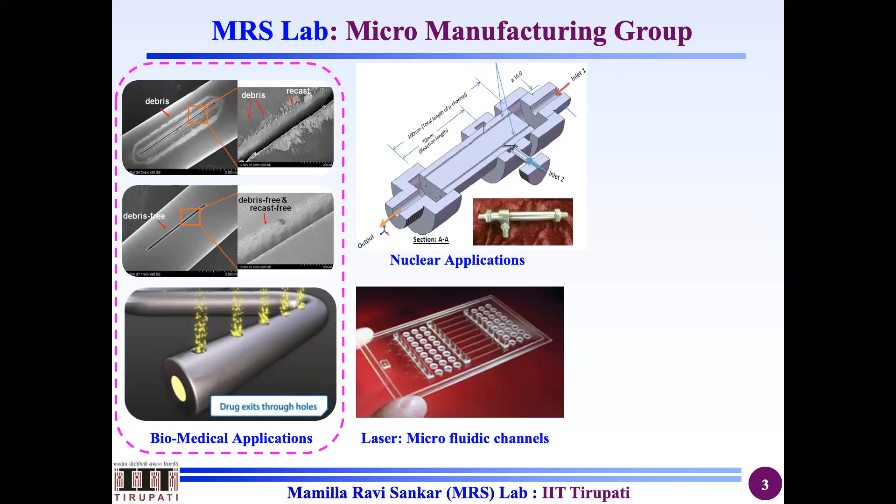The first group is the micro machining and nano finishing group. We work extensively on micro machining of drug eluting stents, and micro machining for a lot of things like nuclear applications, microfluidics, automobile applications, and we also do laser cladding systems. Laser cladding is again one way of additive manufacturing, because you are going to coat some microns of thickness on the surface.

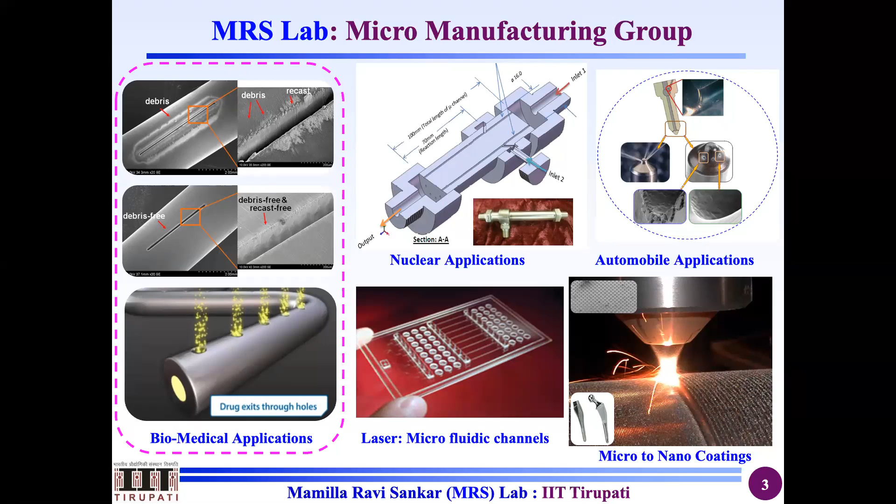Okay, so you can do this coating by multiple means. Being a mechanical engineer, normally we try to do it by lasers. However, there are better processes such as physical vapor deposition, chemical vapor deposition, and HVOF, high velocity oxy-fuel coatings, and many varieties are there.

Another variety of finishing process that we work on is magnetorheological finishing. These types of finishing operations are mostly used for lens polishing applications. For example, I would like to tell you how the lens is going to be polished. Once the fluid is there, it is randomly oriented.

Whenever a magnetic field is applied, for example, if I stop this, the magnetic field will come. You see the red lines, this magnetic field comes. Now, once a magnetic field comes, what is happening? This is the application of magnetic field by virtue of electromagnets. These are called CIP particles, carbonyl iron particles, and these are abrasive particles. So this polishing is called smart polishing.

For example, if you take the grinding process, how do you specify a grinding wheel? Type of abrasives, size of abrasives, grade of the wheel, structure of the wheel, bonding material. These are the 5 varieties. Grade of a wheel means how firmly the abrasive particle is held by the bonding material. So at a particular instant, you can order soft grade, hard grade, or medium grade.

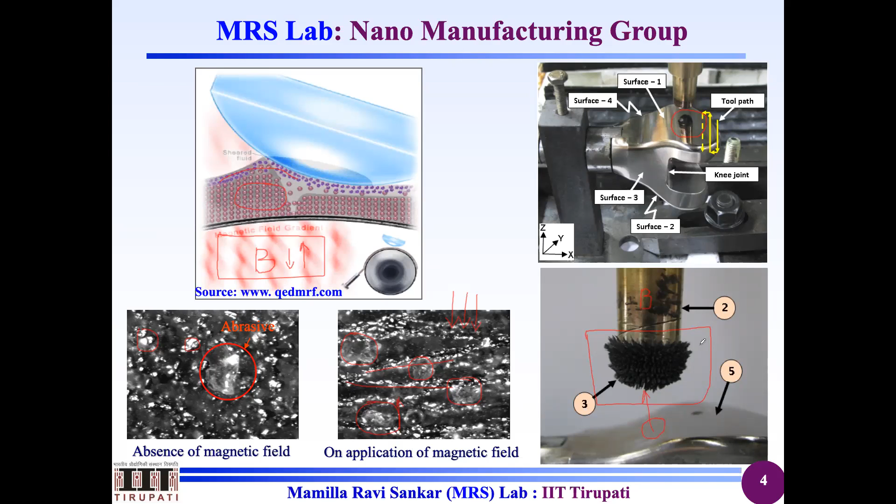Nowadays, soft, super soft, and ultra soft came into picture. So this depends on that. How do you decide? It depends on the force the bristles apply on enamel. That decides whether it is hard or whatever. So nowadays hard and medium are slowly nullifying, and you are getting soft, super soft and ultra soft. Like the Colgate sensitive toothbrush will be ultra soft. So that is one area.

The second area where we extensively work is sustainable manufacturing. Sustainable manufacturing means whenever you do, I don't know whether the video works or not. Yeah, video is not working. So it is saving our time. Okay. So what is sustainable manufacturing? What we talk about is that

whenever there is a machining operation, temperature rises. When the temperature rises, to cool it or to overcome it, you have to take two options. One is going for the hardest tool which can overcome these temperatures. That means either you have to go for a CBN tool or a diamond tool, which is not an economic option as far as developing nations are concerned. The second option is cutting fluids.

Cutting fluids range from 1200 to 1800 or 2000 per 20 liters. Each liter of this cutting fluid can be mixed with 10 liters of water. In that circumstance, it will go to 220 liters. So 220 liters you are getting for an average price of 1500 rupees. That means less than a cutting tool. Okay. That means being a developing nation, we try to go for cutting fluids. When you go for cutting fluids, what will happen?

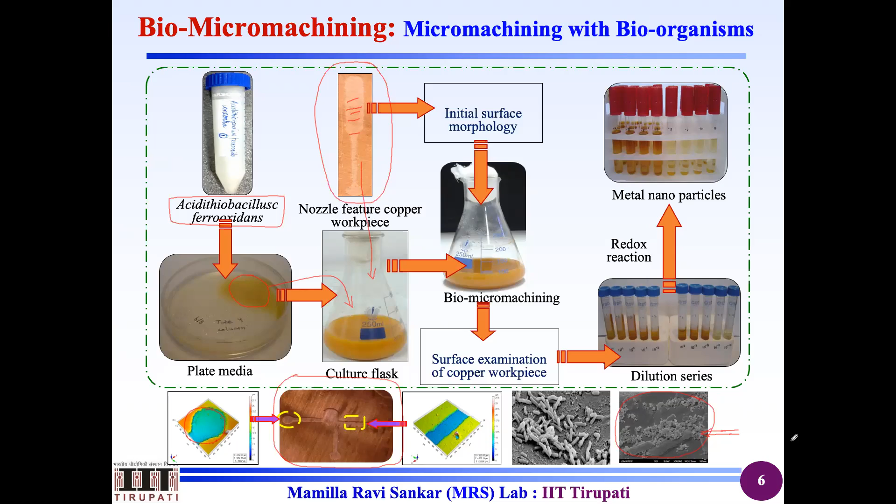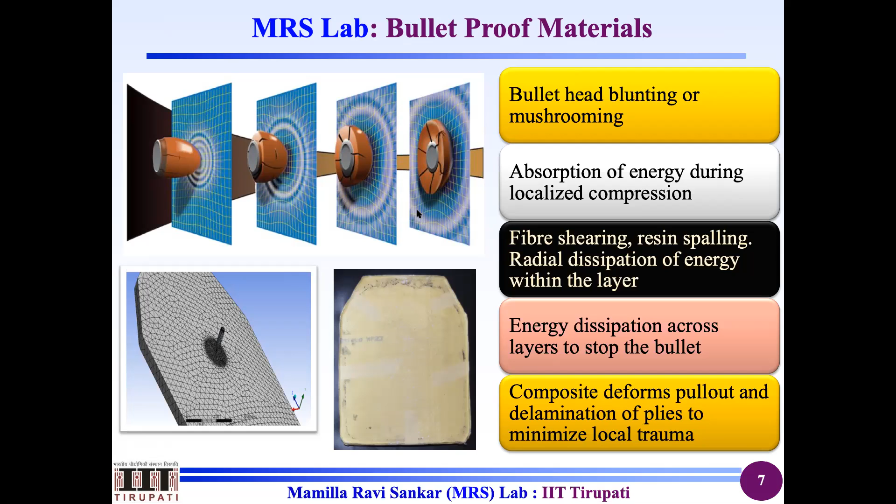So second area, the same guy is continuing his PhD. He is Lieutenant Colonel Sanjeev Kumar Sahu, currently working at Jammu Kashmir. So they have their own facilities, and we only support partially. So our role will be very minimal here. However, since our inputs are always well taken, this is a project that we are doing with IIT Guwahati, because he is my old student.

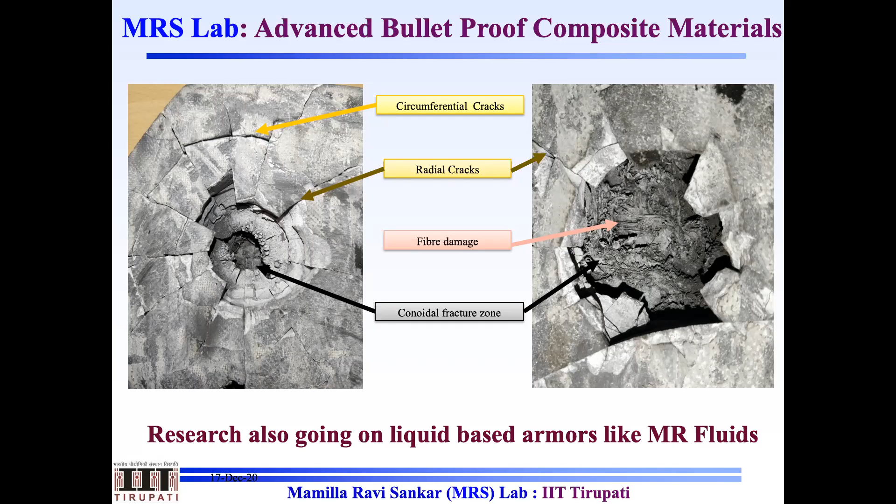So what we do is, this is for ballistic impact test for vehicles, because people are transported from one place to another place. So there will be firing from the opposition and other things. So for this purpose, we are developing ceramic composites. As you said, we also work on additive manufacturing processes. But the most important thing is that one has to wisely think, as per today's concern, where to use, where strategically one has to use.

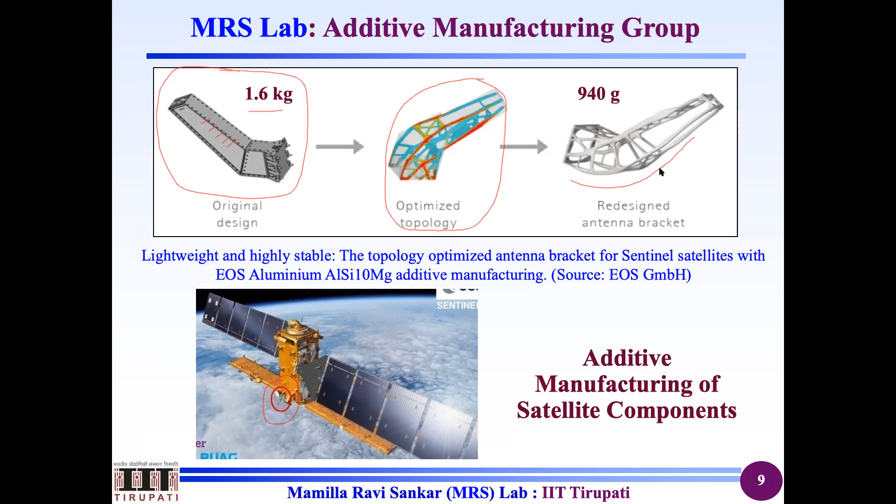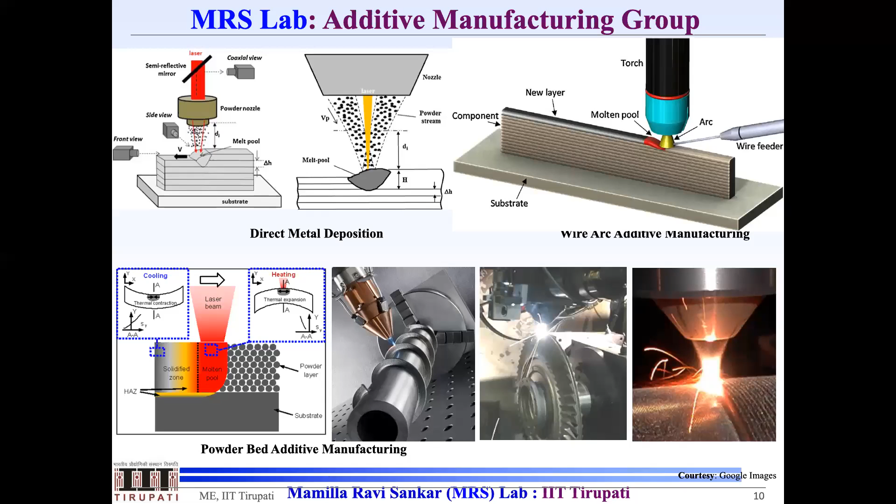At IIT Tirupati, along with our collaborators, we work in many areas of additive manufacturing, ranging from direct metal deposition or direct energy deposition, wire arc additive manufacturing, or another concept called tandem wire arc additive manufacturing, where we do functionally graded materials, powder bed fusion technologies, and many other technologies. We are doing repairing, laser cladding, you have seen already. So laser cladding, you can clearly see here, once we do the cladding process. So primarily we do the cladding here.

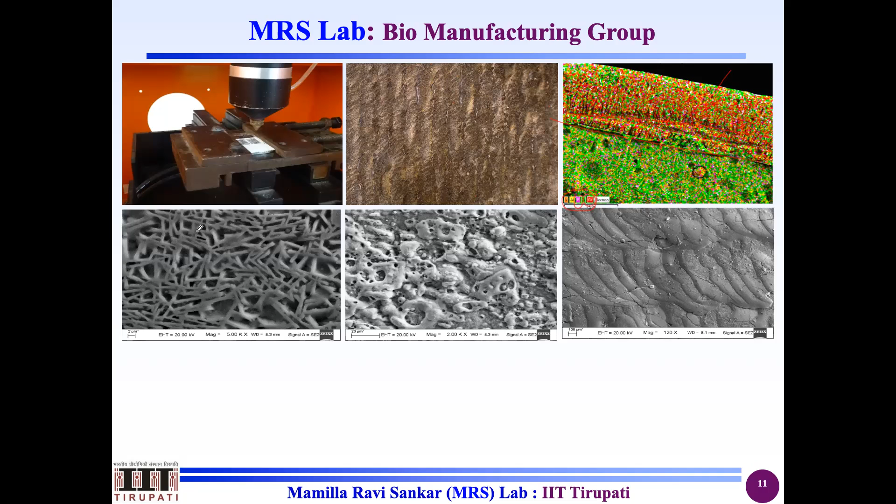Okay. Once you coat, you should also clearly know what type of surface you are going to get. In this case, needle type of structures for some input parameters. For some input parameters, you get circular porosity. For some input parameters you get very less porosity. Why do you require porosity? That is called scaffolding technologies. Because you people are from Kerala, you should know it in a much better way, because Sri Chitra Tirunal Institute is one of the famous institutes in India, with expertise in scaffolding and other things.

Scaffolding is much required for cell culture applications, implant applications, and other applications, because the cells have to grow properly. If you want to grow a plant, the roots have to go inside the mother earth. That is most important. So the roots have to go inside for firm bonding abilities. That's why you require a porous nature, and you can see the cell density per unit area and other things.

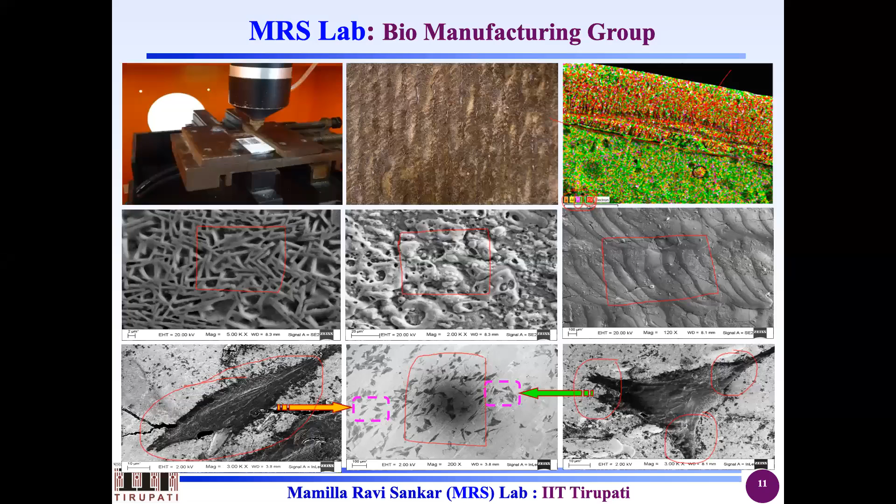Okay, so we also work on laser texturing, because laser texturing is most important especially for titanium implants, because whenever you do laser texturing, titanium is a highly reactive material, so titanium oxide will form, and titanium oxide is partially biocompatible.

If you want to coat a biomaterial, you can use titanium oxide as a binder for hydroxyapatite or bio-nanoglass. Then you can coat it. For everything, you need to do a lot of characterization in terms of SEM analysis to know how the texturing is done, how the microstructure is there, how the metallurgical structure is there, and the 3D surface profiles.

The other important thing we have to do, which we have already done but isn't in the slide, is contact angle measurement. Once you make a contact angle measurement, you can determine whether the surface is hydrophilic, hydrophobic, superhydrophobic, or none of the above.

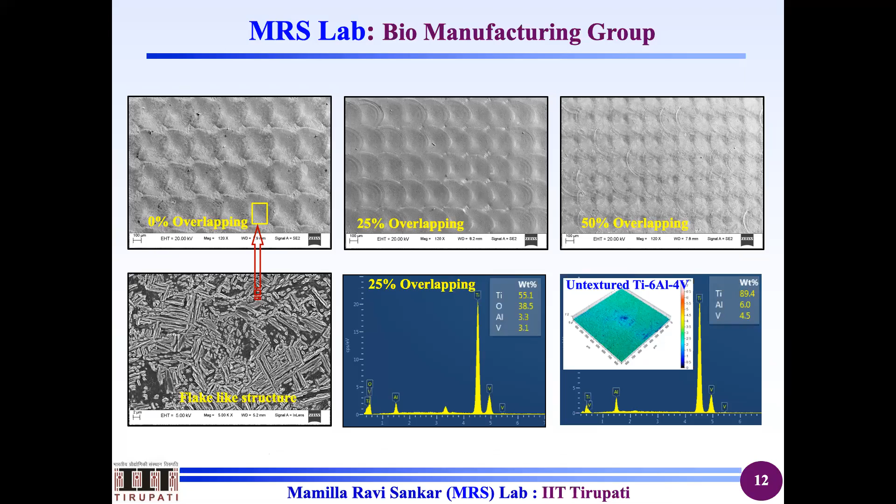Once you do all these things, then you have to go for in vitro biological characterization, called simulated body fluid studies. What you are going to do is place this particular coated and textured surface, and the tribological aspect has to be understood. Once that is understood, you need to go for biological understanding.

You can clearly see the background looks black, but it is not originally black. This surface is so shiny that the background appears black. So the hydroxyapatite coating - this is the coating region, and whatever flower-like structures you are seeing is the apatite layer.

That means that this material is biocompatible. How can you say biocompatible? It is exchanging the proteins, it is exchanging the minerals and other things.

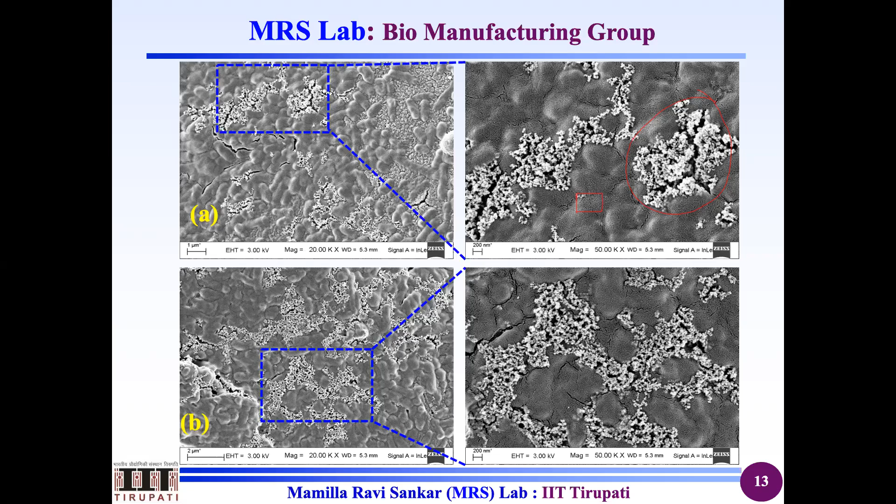Once you do this, then you have to go for cell culture studies, which you have to understand and characterize using fluorescence microscopy. Mechanical engineers mostly wonder how and why you require fluorescence microscopy. It is useful in multiple ways: first, to understand how the cells are growing or not; second, any foreign growths are there, like fungi, bacteria, and other things; and third and most important, one has to understand how many cells are growing per unit area - that means cell density.

These are the three things for which normally we get the required cell lines. For example, in this case, it is osteoblast cells for bone applications. MG63 cells are procured and grown on top of the bioceramic coated surfaces, functionally graded bioceramic coated surfaces. Then afterwards, we characterized using fluorescence microscopy.

Before characterization, you have to give two dyes, that means colors. One is green, another one is red, so that the green occupies the actin filament and the red one occupies the nucleus, basically.

The basic problem here is that you are going to coat a titanium implant, and the titanium implant is not biodegradable. For example, a common man gets an accident and goes to hospital, undergoing a 1 lakh rupee operation. After 1 year, he needs to take those things out because it is not biodegradable. That means a secondary operation is required, costing approximately 0.5 to 0.6 times, that is 50 to 60% of the original cost. So the total expenditure for that operation becomes 1.6 lakhs.

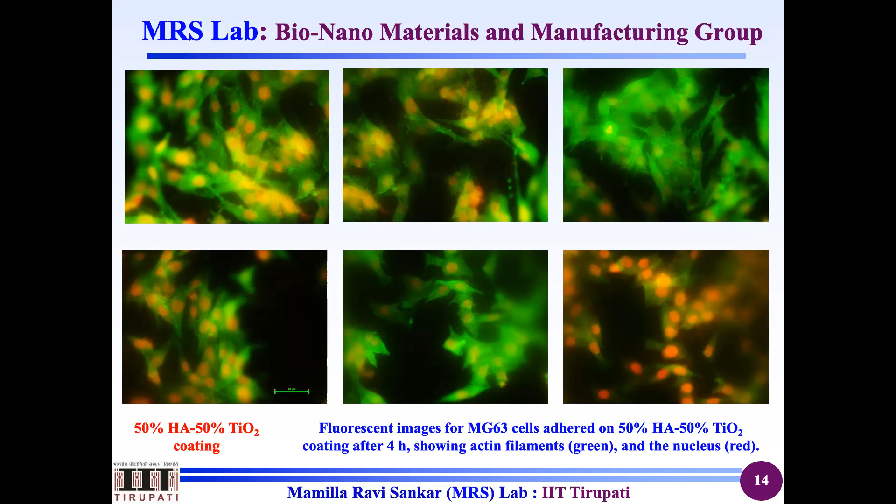So how to overcome this, we have understood. How to reduce the secondary operation - for this we have developed biodegradable polymers. In the case of biodegradable polymers, we have developed multiple polymers like PLA and PEG.

Let me explain about PLA. We do this in two ways: one is developing the lactic acid monomers, or you can also purify commercially available PLA. That means you take the PLA and try to remove the metal oxides and other impurities to check the purity. Once you do all this, you have the monomer or polymer.

With the monomer, you can do polymerization or in situ polymerization, and then make your own strands. For example, for a 3D printer, you can make your own strands depending on your compositions, or you can make your own disc for many applications.

What we have done is work with polymers blended with hydroxyapatite and other things. Hydroxyapatite is also purified and purely manufactured at our site and laboratory, and we have used it. The polylactic acid also is completely indigenous.

That's why we have patented this particular technology. And with the implants, you can see, if your composition is there, you can play with your molecular weight and other things. For example, for a patient, we want the degradation after 3 months, because after 1 month, he is ready for rehabilitation and might have been cured, or completed his functionality and other things.

For an elderly patient, it will take a lot of time, double the time of a young patient. So in that circumstance, you need to play with the molecular weight so that the degradation controlling can be easily controlled. So what we have done in this particular technology is internal fixation devices like cortical screws, cancellous screws, Steinmann pins, plates, staples, and other things. You can see the applications of those things adjacent, shown schematically - how the Steinmann pin is going to be used and other things.

So what is the advantage of this particular technology? The advantage is you don't require a secondary operation because this will degrade inside. Polylactic acid degrades to lactic acid, which is useful for the body. Second, hydroxyapatite is calcium phosphate. Both degrade into calcium phosphate, which is also useful for bone growth and other things. Everything is useful, so there is no problem of degradation inside the body.

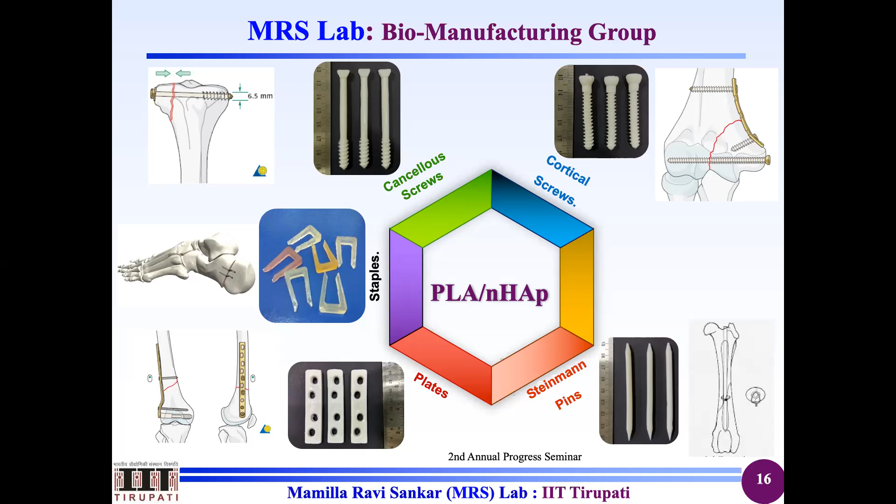Now, can we reduce it still further? Yes, for some cases we can. Those are cases whenever there is a fracture, hairline fractures, or some low load applications for hand and finger - if you see the surfaces, they are very, very rough. In fact, 3D printing cannot do those types of complex features.

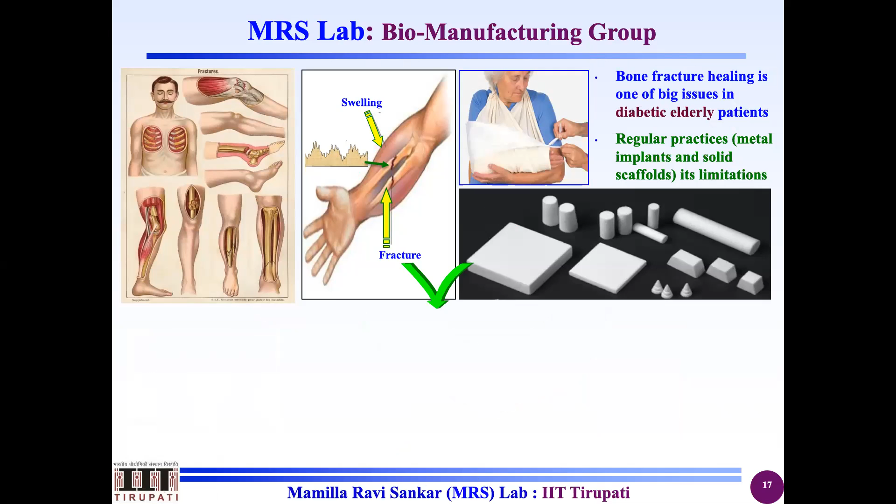So what we have done is we have developed an injectable, thermosensitive magnetic scaffold, which is a liquid at room temperature of 22 to 25 degrees. Once we inject it into the site, since it's 37 degrees in the human body, it goes and occupies the nooks and corners, because we study the rheology - the rheological study of its flow as well as deformation, and the tribological effects due to micro vibrations, nano vibrations, and other things.

So the advantage here is you don't require the 1 lakh. Why? Where is that 1 lakh going? It's going for pre-operation testing, post-operation rehabilitation - you have to stay for 3-4 days, plus operation theater cost, surgeon cost. These are the major expenses, not the implants or internal fixation. Internal fixation implants, whatever you've seen in the previous slides, may cost 2,000 to 5,000, maximum 10,000 rupees. So if you take the positive side, your expenditure won't exceed more than 25,000 to 30,000.

That means whenever we try to do research, the motive should be that you are able to help the common man. In fact, you should be able to help a poor person. If you are going to help a below-poverty-line person, that means you are a good person and you are doing your research in the right direction. That is what I can say.

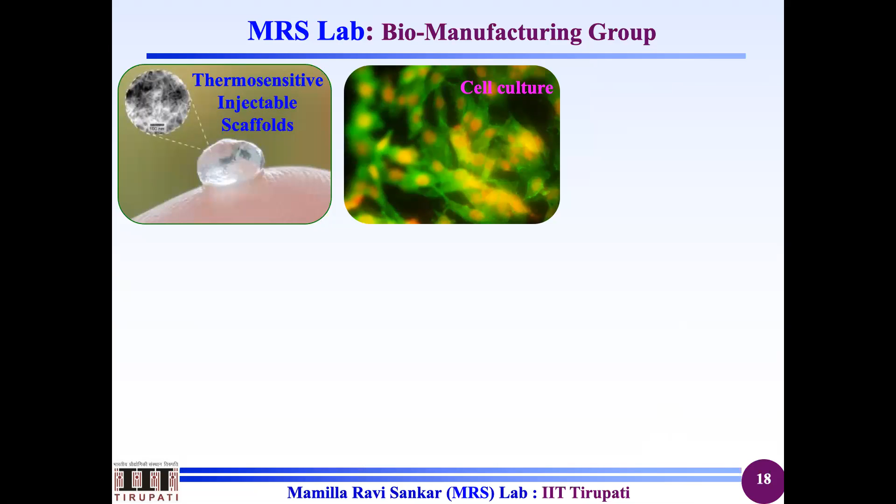Once we have knowledge about this polymer matrix and the polymer nanomatrix and other things, because of nanoparticles and other things, we also have the technology for cell culture in these matrices and other things. And we are now venturing into another area called 3D bioprinting technologies. We are not using 3D bioprinting for the ear and other things - we are only concentrating at this moment on skin applications, because it is slightly easier compared to organ printing and other things.

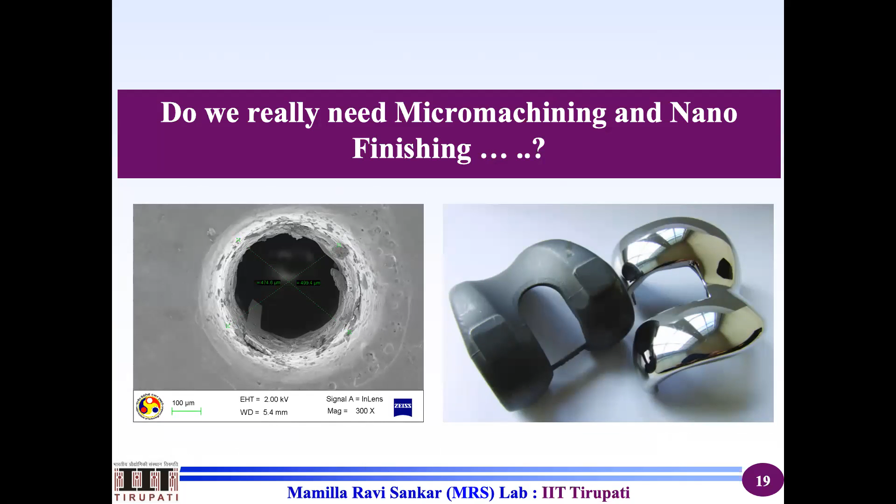Do we really require micro-nano finishing? Yes. If you see the micro-nano finishing, in the second image, nano finishing is most important in terms of using it for biomedical applications and other things. These are the biomedical applications where one has to polish. So how to make a smart system for this polishing of biomedical implants?

Polishing of these implants manually is very dangerous, because today the worker may be happy and do the polishing with good patience. But assume tomorrow he has a quarrel with his wife at home, whatever anger he has will show on the implant. That's why automation comes in, and now smart manufacturing, everything has to be smart now.

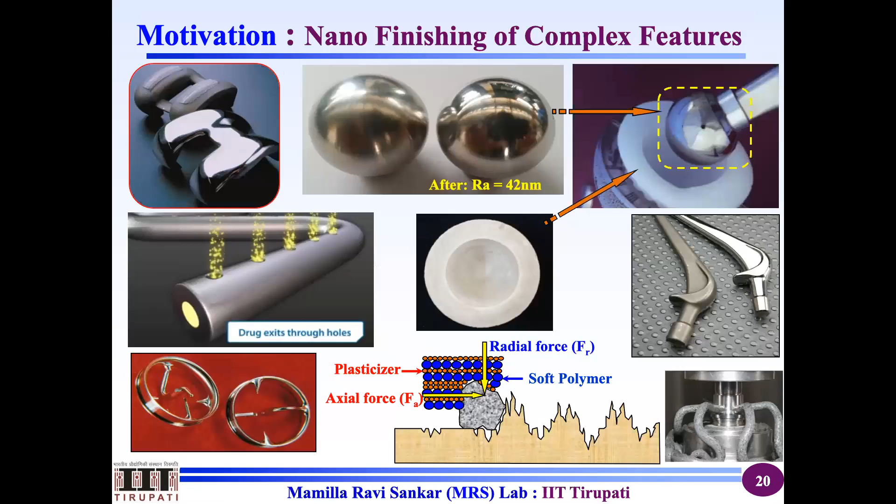So how is this done currently in the Indian scenario? First is vibratory bowl finishing process, where you dump all the implants and rotate them. The problem here is multiple. For example, if you take this as an axis, an implant here will rotate only this much distance, but an implant on the surface will rotate about this much axis. So there will be non-uniform surface roughness on the components. For example, these components are fragile, so what will happen? They may collide with each other, and may fracture.

To overcome this, Indian industry is coming to another technology called drag finishing. Clearly watch the video so you understand, where you can have one implant at one location. One holder will have 5 to 6, but their position is fixed, so the implants won't impact each other. That is the only advantage. At the same time, you can slightly achieve uniform finishing, but it is a global spectrum, not a local spectrum, meaning micro-nano location. You can see the zoom version here.

So the rotational speed and other parameters, you can see here the implants are now slowly coming up. Knee implants are slowly coming up. This particular facility we have recently started procuring.

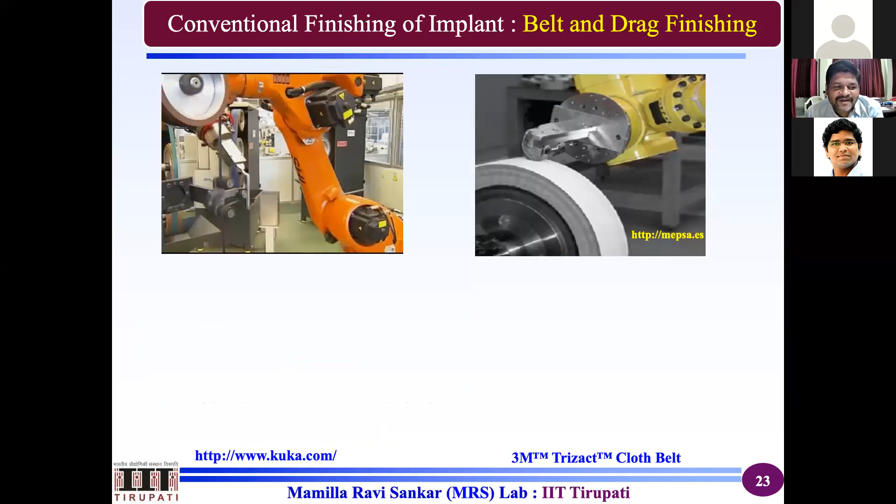So what is there at the bottom, sir? Is it abrasive particle or sand? What, can you repeat the question? What is there at the bottom, is it abrasive particles or sand?

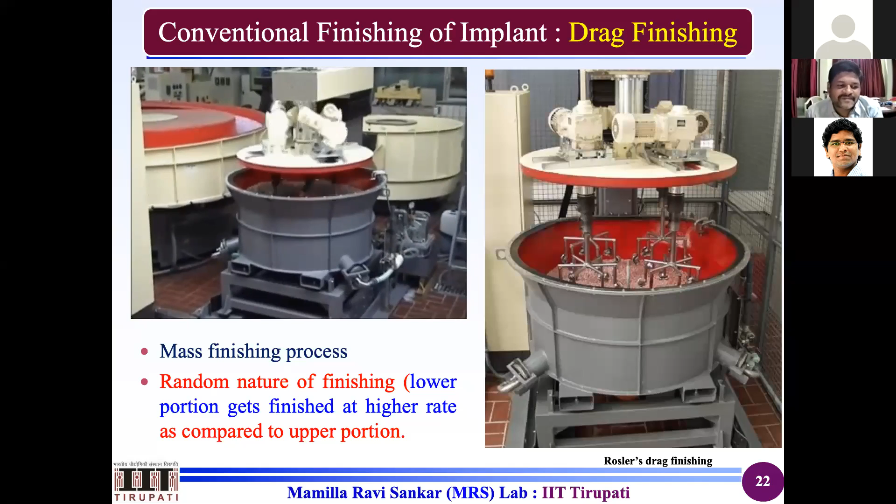Abrasive particles. Those abrasive particles are slightly different from normal abrasive particles, and slightly bigger. It looks like a cone, with so many abrasive particles. Even some chemical will be added, you can see from the side a chemical is coming. So these abrasive particles are big, called abrasive beads. This is for mass finishing applications or batch finishing applications.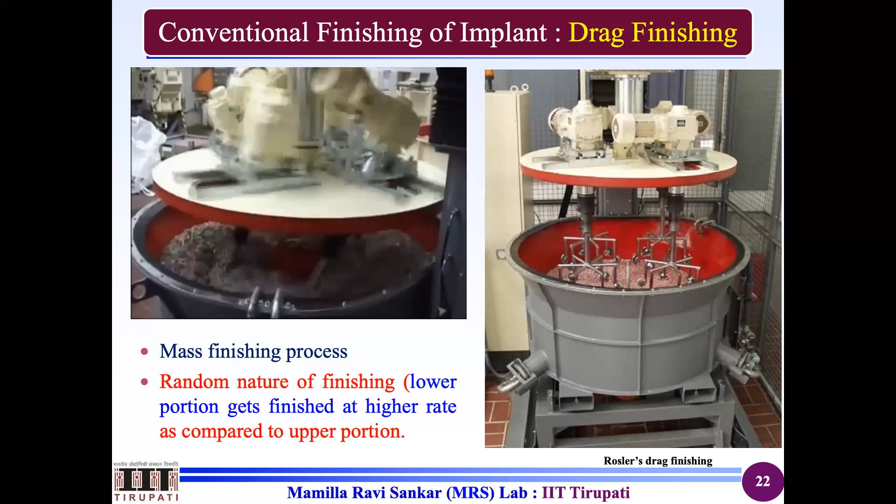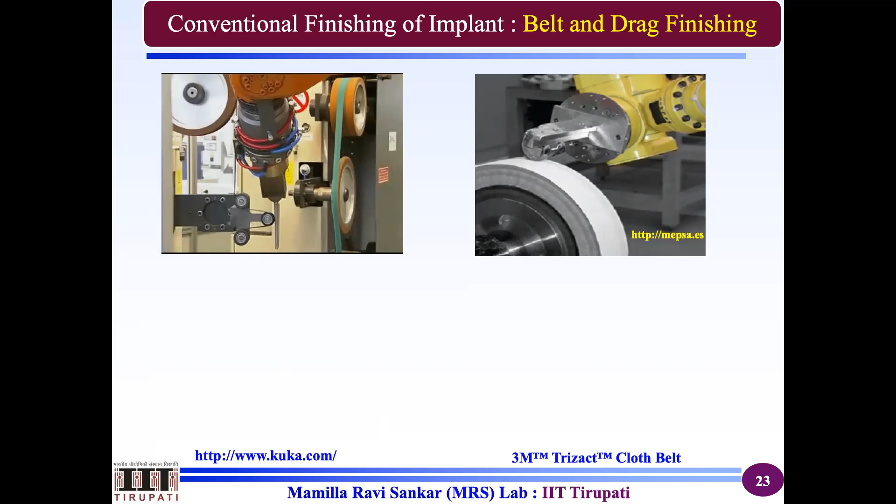Another thing people normally use in the industrial scenario is robotic grinding. You can see for a hip implant how it is going to be finished. This is not viable for nano finishing, because you may get a good surface finish up to 500 or 600 nanometers. If you still want to go below that, it will be a problem.

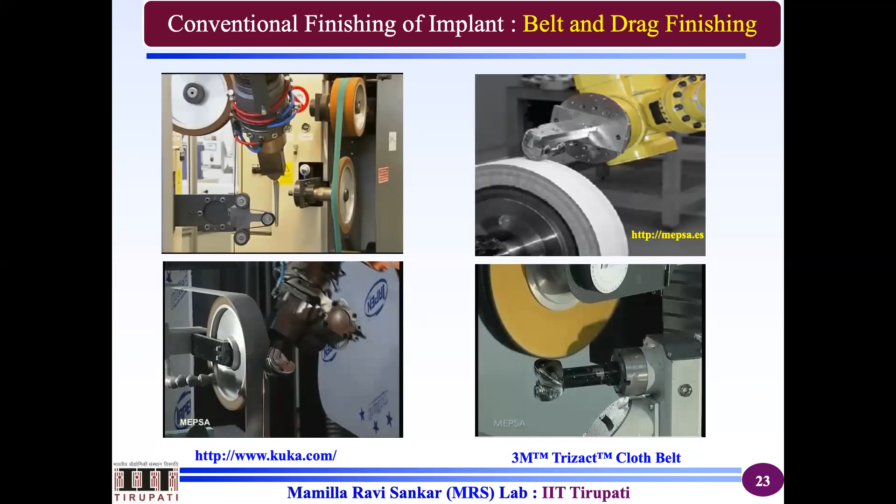That is where people are going towards liquid based or semi-solid based cutting tools. Because if you hit with a tennis ball versus a stone, where will you get more impact? With a stone you will impact more. Assume the velocity and size are the same, your stone will impact a lot. When your stone is impacting a lot, the indentation depth will be high, meaning the roughness you achieve is not up to the mark. That's why we are moving towards liquid based technologies.

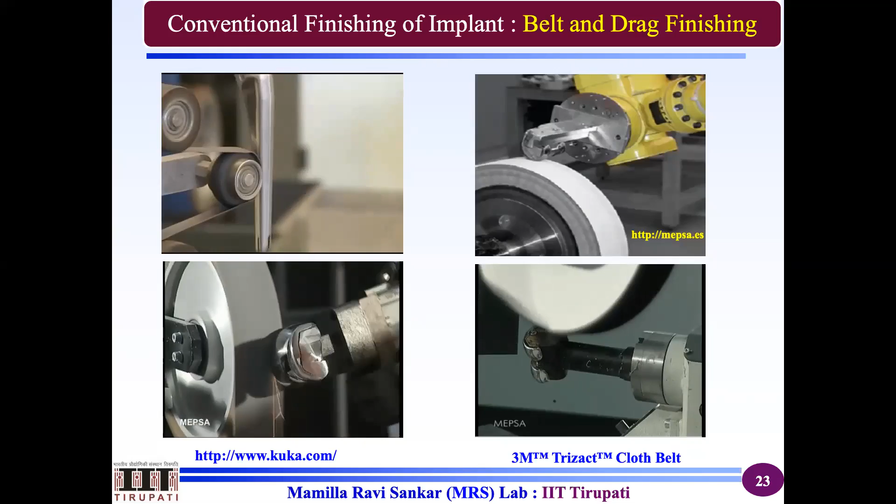So the drawback is that all solid tool interaction forces are very high. That's why in the present study, we are going to use polymer based finishing technologies where high viscous, medium viscous, and low viscous fluids are developed, and we have patented these technologies.

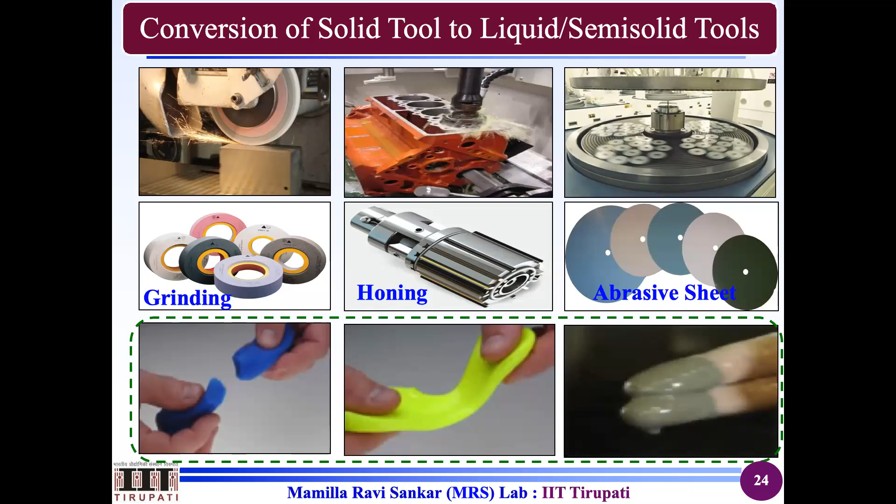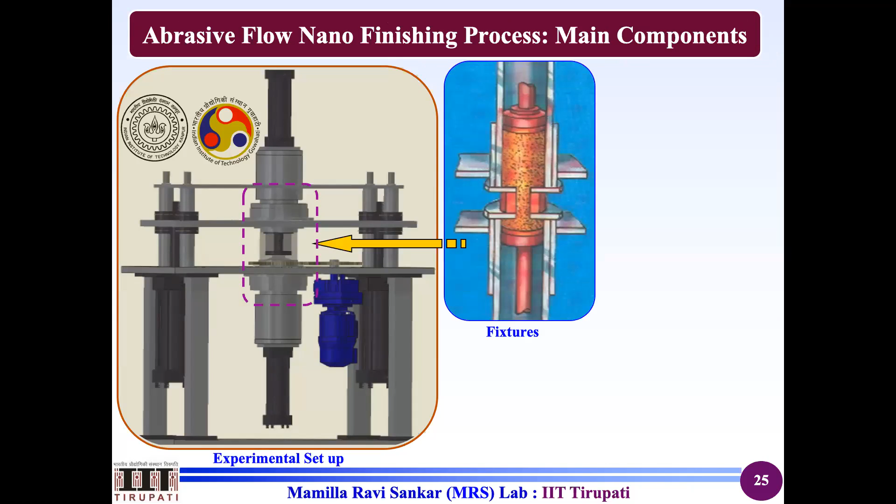This is the smart machine. How we made it smart, we'll see in the last few slides. First we have to understand the machine, then only we can make it smart. So this is the structure, with fixtures and most importantly the medium. How the medium works may not be important here.

Now you can see how the medium works. The medium works on a viscoelastic principle. This particular slide almost took us 2 to 3 years of our PhD life. It looks very simple, but we tried different polymers, and those were not giving a good surface finish down to nano.

For example, 10 nano, 20 nano and other things. We are regularly getting 100 nano, 200 nano, 300 nano and other things. But whenever we want it to 10 nano, or below 50 nano, or below 100 nanometers, it is a very rare case that we are getting it.

In that circumstance, we went on to one of the science understandings that is called viscoelasticity, or the viscous and elastic component. For example, here I will just explain to you. You take a viscoelastic polymer which is supporting the abrasive particles. Green ones are inactive abrasive particles and blue ones are active abrasive particles. Active abrasive particles means those which are in contact with your workpiece.

Now you are taking an element of viscoelasticity and you are applying a shear force. It has a viscous component, it has an elastic component. The viscous component tries to move along the direction of application. The elastic component moves perpendicular to it. Now the question is why and how. So you take a viscous fluid like honey, take it into your hand and try to throw it in one direction. Throw means you just push. What will happen? It tries to move in the direction of push. That is because of its viscous nature.

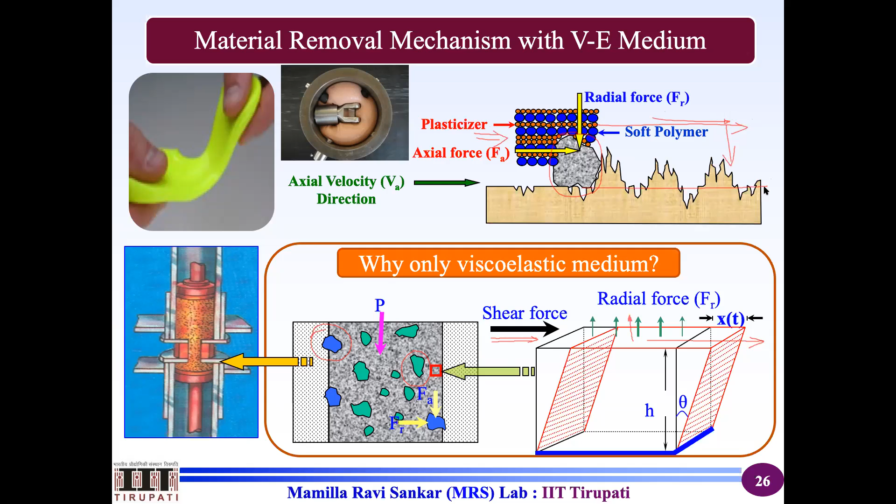So the medium is a bit complicated. It flows like a fluid, it behaves like an elastic ball, it behaves like a plastic piece also. Flows like a fluid means whenever you make a spherical ball and put it on a flat surface, it will become flat at the bottom. Second thing, it behaves like an elastic ball. It is becoming flat on the surface. Do you think it is sticking? No. If you just try to lift it up, it will come.

So if you make a spherical ball again and try to hit it onto the ground, what will happen? It will jump like an elastic ball. Okay, so that is what happens. Third, it breaks like a plastic piece. Means you just take the medium into your hand and try to pull. What will happen? It will just break into pieces.

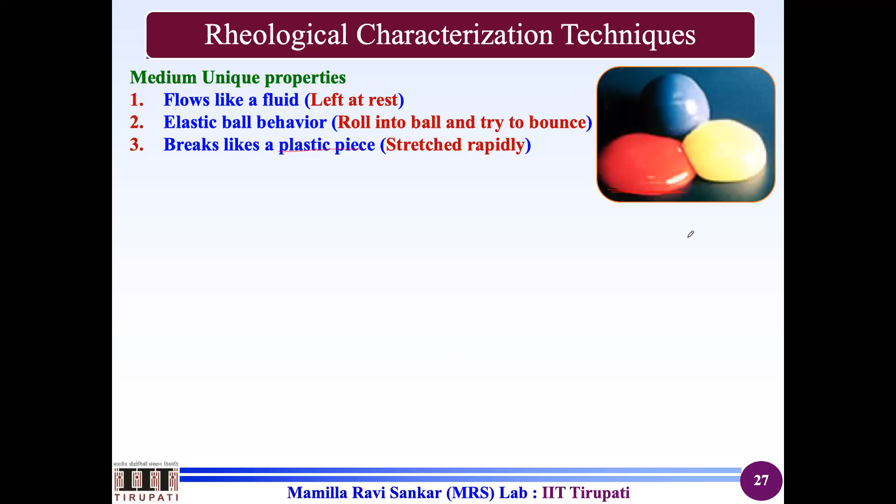So what do you understand from these statements? The flow behavior and the deformation behavior are completely unique. So one has to study the science of flow and deformation. That is nothing but rheology. Rheology is nothing but the science of flow and deformation. So we have studied multiple rheological properties.

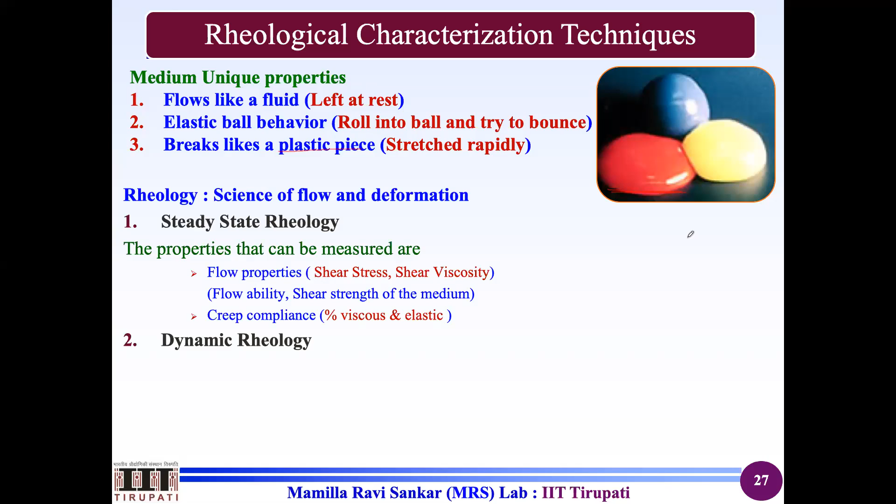However, for a small glimpse, we are going to give you a few experiments: steady state rheology, where we are going to explain the flow properties and creep compliance or creep recovery, and dynamic, where we are going to give you frequency sweep and amplitude sweep. Currently, we are going to give frequency sweep only.

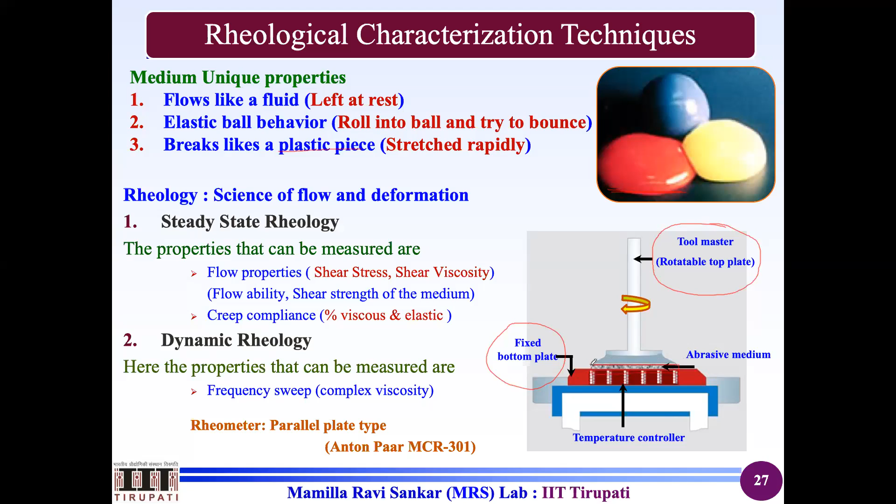The schematic diagram looks like this. This is the bottom plate, which is a fixed bottom plate. And this is a rotatable top plate, which is also called a tool master. And in between, you have a medium, the ash color medium. Okay. Now, experimentally, you can see here, this is how the top plate looks. This is the top plate, and this is the bottom plate. And in between, you have a medium. So this is how the medium looks.

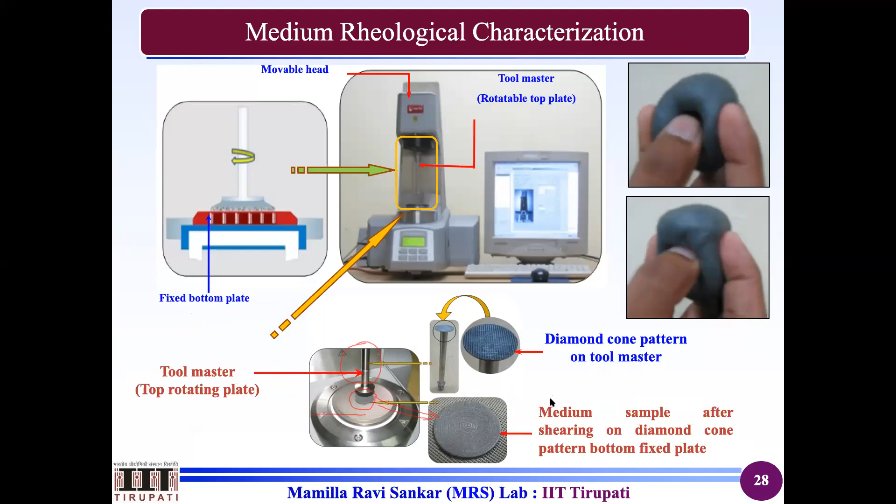As you are increasing the shear rate, that means the top plate is slowly increasing its velocity of rotation. What will happen? Polymer molecular chains are like this and slowly climb one over each other. That means the resistance offered by the polymer molecular chains will gradually increase. There will be a sensor, actually a torque sensor, and there will also be an air bearing and other things.

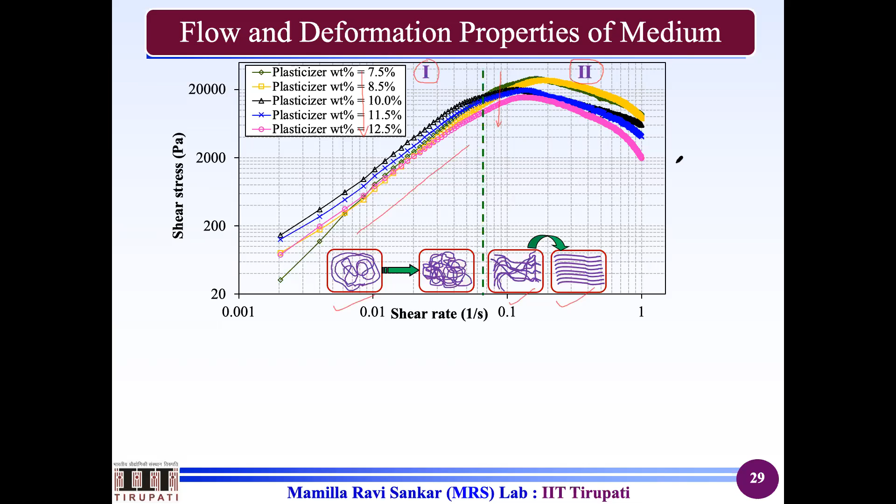I have polymer molecular chains. These polymer molecular chains are nearby. That means the cohesive strength is very high. Interpolymer molecular distance is low. That means the force of attraction between two polymer molecular chains is very high. Plasticizers are low molecular weight materials. However, polymers are high molecular weight materials.

Whenever low molecular weight materials are blended with high molecular weight materials, the low molecular weight materials try to go and sit in between and try to kick them apart. So what will happen? Gradually, the distance between two polymer molecular chains increases. That means the force of attraction between two polymer molecular chains is going to decrease. If you increase it still further, your force of attraction or cohesiveness is going to reduce.

What is the bottom line of the story? The bottom line says, I have an elastic dominating material, or a viscoelastic material where elastic characteristics dominate. Now I am increasing the viscous component by blending in viscous dominating mediums.

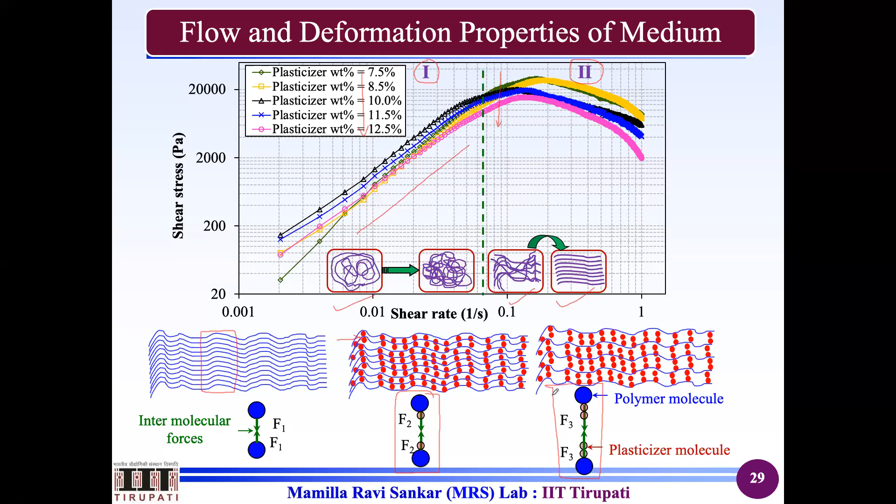Now the second test one normally has to do is the creep recovery test. Why do you require the creep recovery test? I was telling you that this medium is a viscoelastic medium. One should always know how much is viscous and how much is elastic, because you are imparting the viscous component. So if you are imparting it, you should be able to characterize it as well. That's why you need to do it.

So now, how do we do the creep compliance test or creep recovery test? The creep recovery test is done by suddenly applying a certain load at A. You apply a load, hold it for a certain time, and release it. Now the million dollar question is, how much load do I have to apply? For that, one has to do dynamic rheology, which is called an amplitude sweep. Now let's go to the small curve at the bottom.

Now you see here, I am changing the shear stress, which is nothing but our load. The units are different, but I am changing the stress and observing the storage modulus. Storage modulus means the absorbing ability of the polymer molecular chains. There is no change in the storage modulus up to a certain extent, beyond which there is a change. This region is called the linear viscoelastic range. Even though I am changing the load or stress, there is no change in the storage modulus.

What does it mean? It means that my polymer molecular chains are not disturbed, not broken. They are only absorbing the energy without any failure, beyond which they fail. So if I take any particular value in this linear viscoelastic region and put it into this test, my polymer molecular chains are at their original strength and are not disturbed or broken. So I am going to get realistic values of viscoelasticity, the viscous component as well as the elastic component.

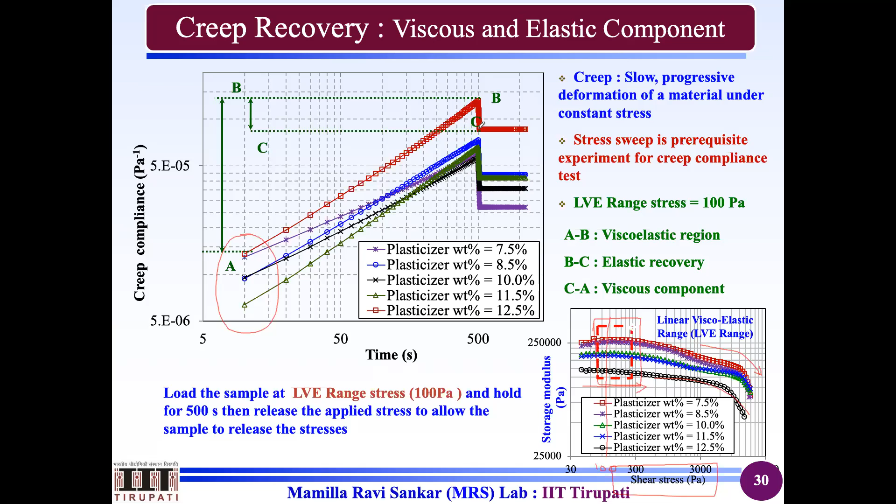That's why we have chosen a value of 100 Pascal, and we apply 100 Pascal at A and hold it for the creep compliance. As you know, compliance is the reverse of modulus. Once you understand this, A to B is your viscoelasticity and B to C is elastic recovery. After that, there is no elastic recovery. Now we have viscous plus elastic, and elastic. From there, we can measure the viscous component. If you see here, if my viscous component is 35%, my elastic component is 65%, because both together are 100%.

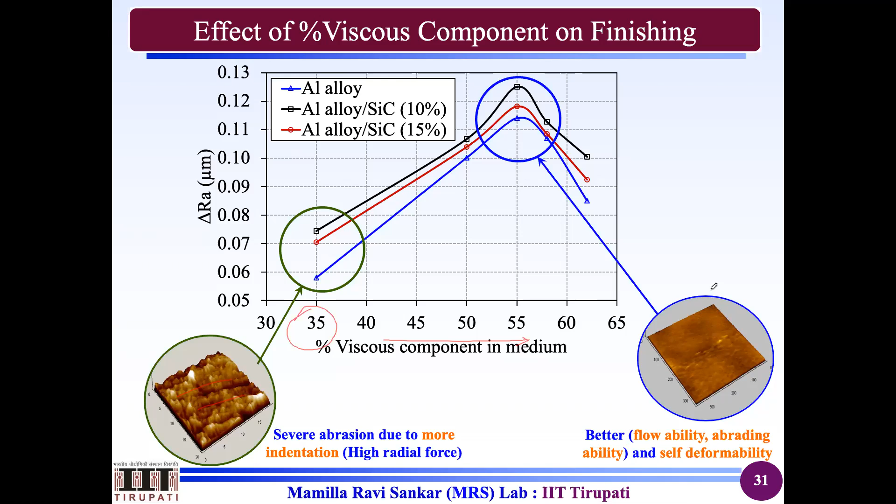If my elastic component is dominating, you can see here, radial force will be high. It is not only shearing the surface, it also creates its own scratch marks. That's why one has to optimize the medium in such a way that you have proper elastic and viscous components. Once you understand the science, these are all applications you can do.

Once you have wheat flour... we used to have one professor, Professor Rajendra. He used to tell us, if you have wheat flour, you can make chapati, puri, dosa, whatever you want. Like that, once you have the science and technology in your hand, patented technology, you can use it for any type of application.

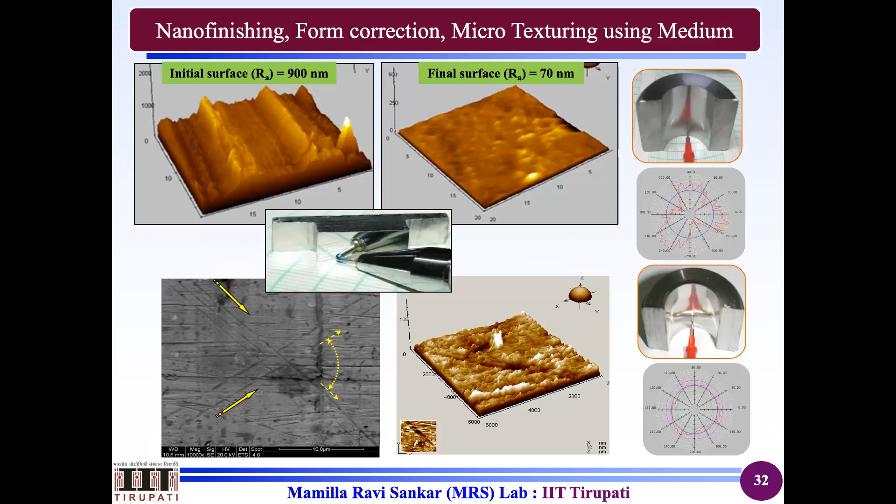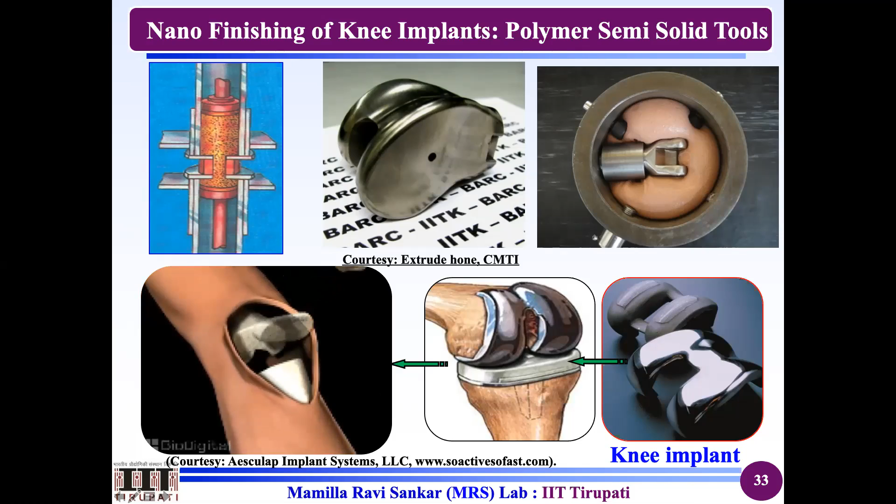For example, in this case, we have used it for knee implant application for polishing and other things. You can clearly see how polishing plays a major role in biomanufacturing. So it can be extended to hip implants, acetabular heads, heart valves, and other things. Second, these are high viscous mediums that we have seen. Now we are going to see the low viscous mediums for heart applications and other things.

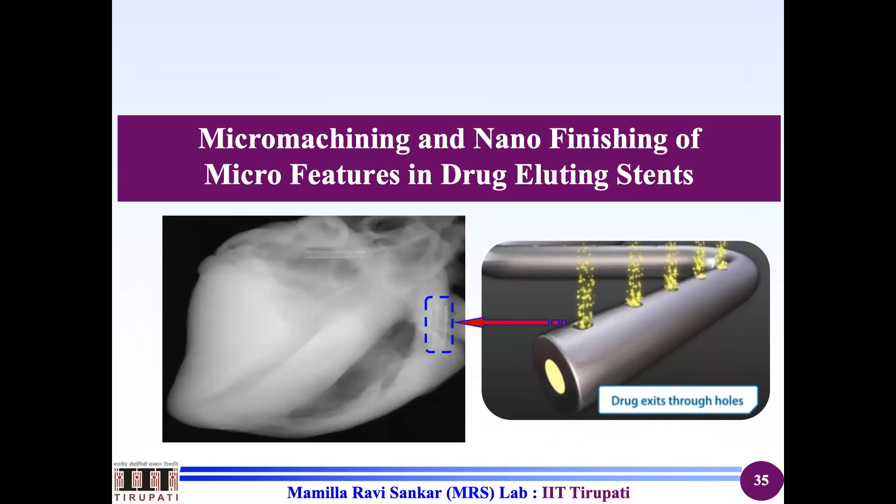I'm not going to touch on micromachining. I would just like to give you a glimpse. Whenever you do laser micromachining and other things, there is a recast layer. The recast layer is very dangerous because this is molten material resolidified, which is not part of the parent material.

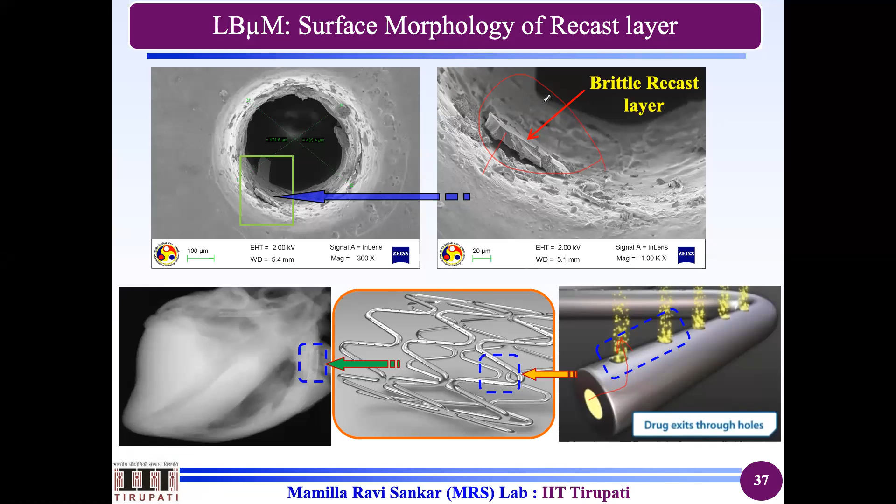Whenever you are going to use it for drug eluting applications or point-of-care technologies, it is very dangerous because it will have a metallurgical change or it will change the drug composition. Second, it can come along with the drug and try to kill the patient. So that's why one has to be a bit careful about this.

The thing is, our medium has flexibility. So we have patented the technology. If somebody purchases our medium, it is high viscous or medium viscous. Our setups are completely controlled by the temperature controlling unit; you will see some images of the systems we have developed. These are smart systems. A temperature controlling unit, a force controlling unit, and all controlling sensors are there.

So assume the application is for small-size or micro applications. You need a low viscous medium, for which our temperature controls or temperature sensors, if you give the signals on the HMI, that is, human machine interface, will suggest what viscosity you need.

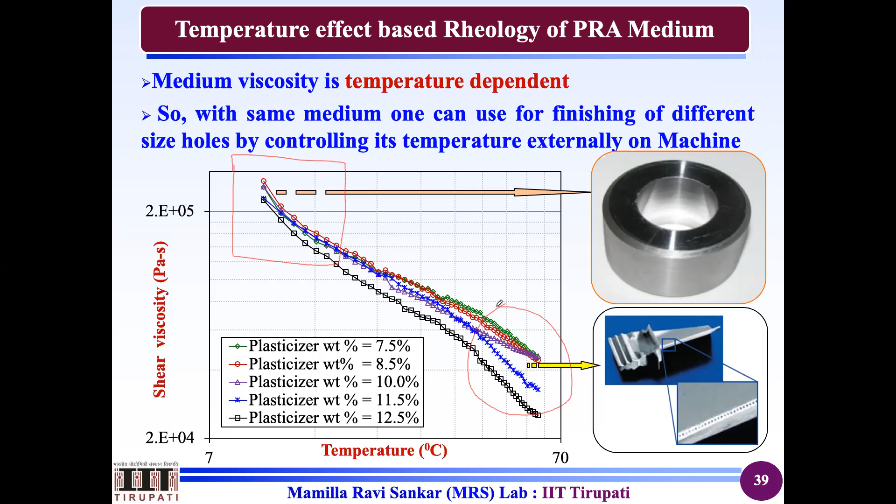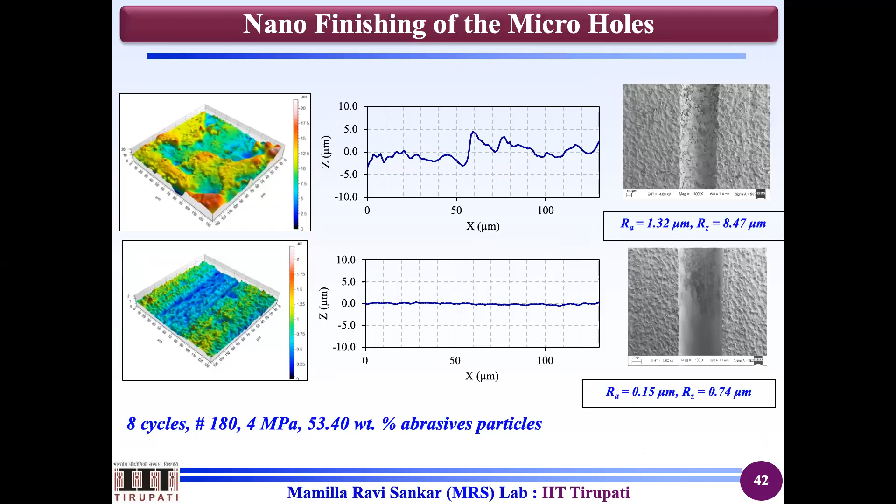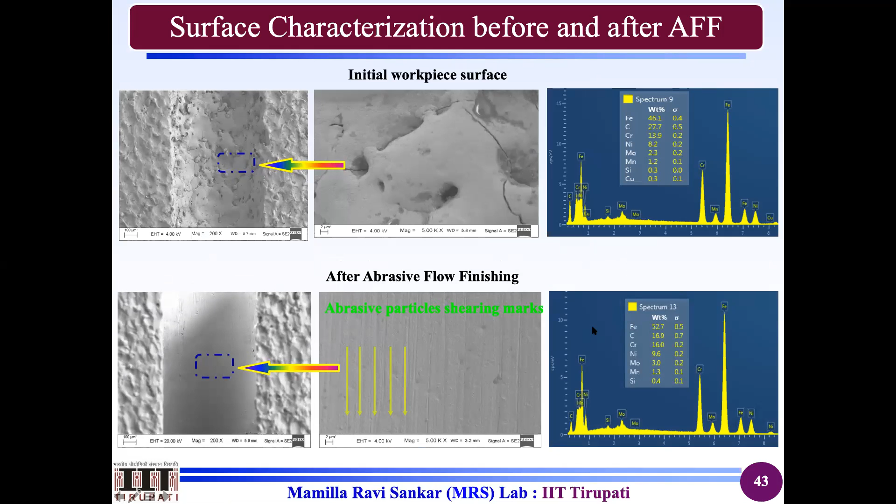This is the polishing. Initially, the surface preparation and other things are of less importance. Once you understand the polishing, you can see here how the polishing has taken place. The recast layer is removed and the parent material is achieved. This test was done on SS316L for the initial studies, and then we proposed it for initial trials.

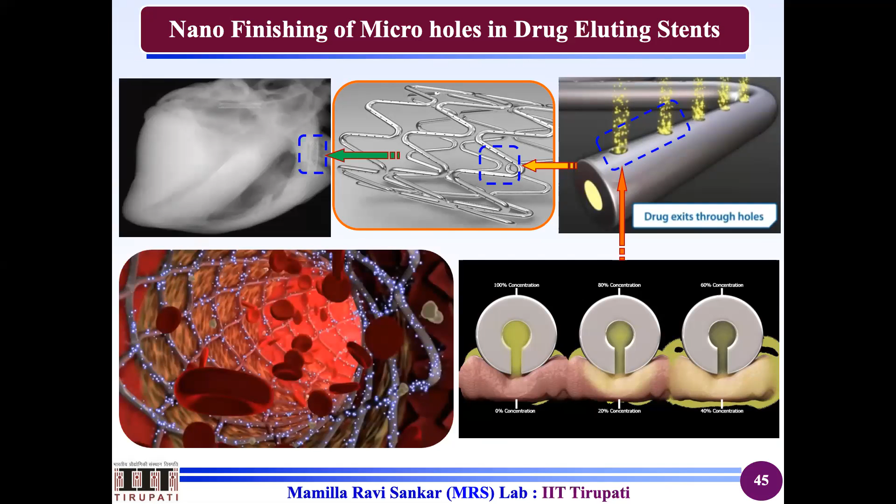We have done up to 50% of the work and presented it to BIRAC, and BIRAC kindly accepted it and gave us about 40 lakhs of funding for testing drug eluting stents. We also do fuel injector nozzles and other things. So these are the main components.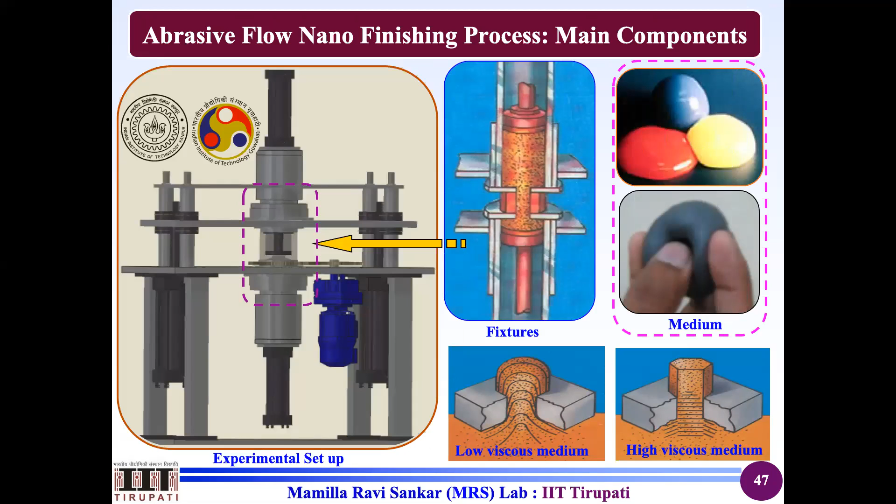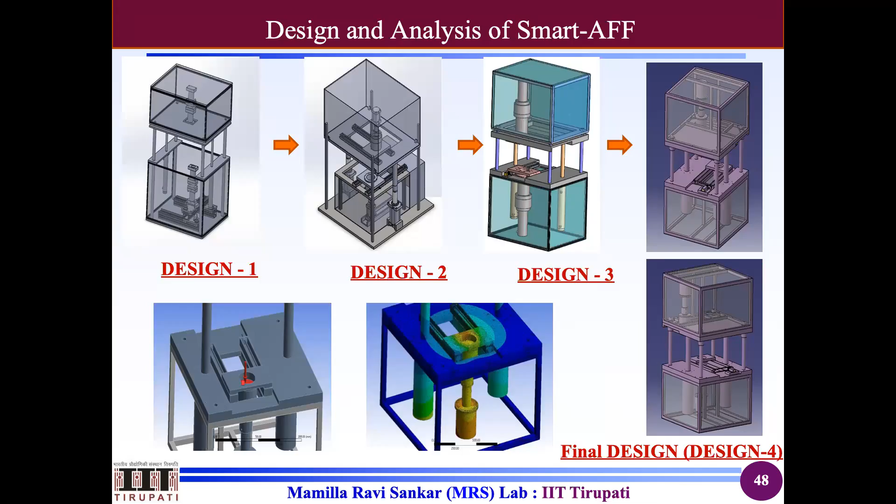Now we will move to how we have converted it into a smart system, just a glimpse. First and foremost, you need to design the system you require. Once you understand the physics of the process, you design your system as per the motion sequence. These are the multiple designs we have done, and the final design is design 4, as you can see here. Once you fix your design, you know what motions you want, where and how to control them.

For example, whether you want to control by pneumatic or hydraulic means, linear slides and reciprocating slides. At the same time, you need to work around the existing patents, because in this area there are already 5 to 10 patents. So to have patented technology, you should do a lot of work. I cannot explain much because this patent was applied for recently; we already have 2-3 patents in this area, but this is a smart one.

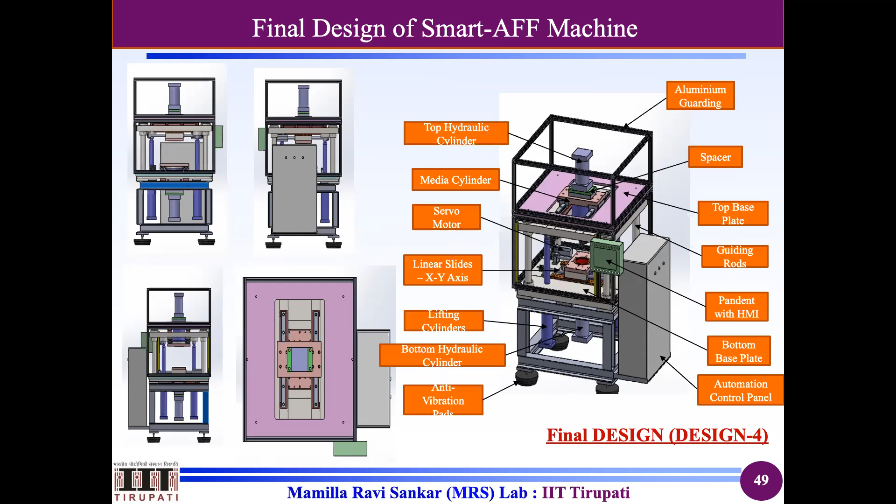So how you build it: you see the electronics, the base structures and other things, how we are going to build it. Once you build it, you need to control it by the electronics.

You should understand the electronics. At the same time, what is the thing that you want? What you want is to move the medium across the surface to be polished, and how we are going to move it is through the hydraulic power pack.

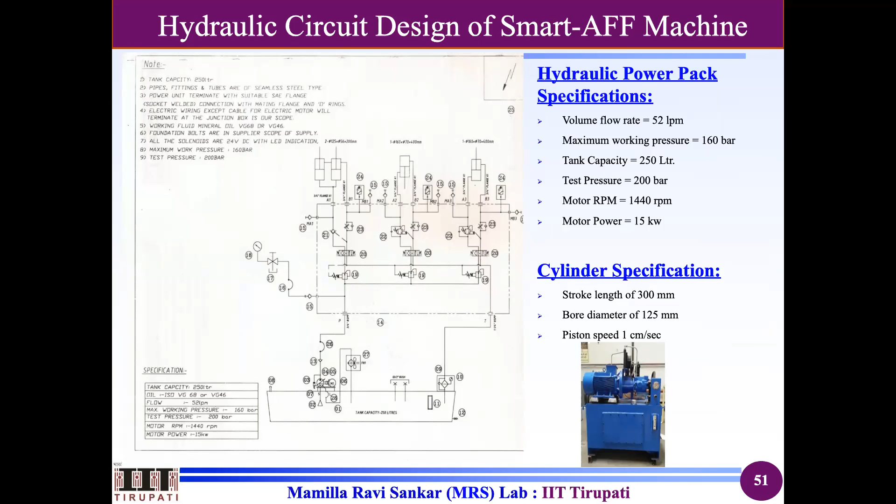Now one has to understand the intricacies or internal circuits of a hydraulic power pack, which is given here, and you have to draw your own internal circuit and control your solenoid valves, limit switches and other things. Once you have done that, you should make an HMI, which is electronics embedded systems, which I don't have much rights to explain in a greater way.

We have one HMI, that is called human machine interfacing, that you can see in the upcoming slides, where you give the instructions. For example, I want 50 cycles, extrusion pressure is 6 megapascal and other things. Then a programmable automation controller PAC will be there, which can convert analog input and analog output into digital input and digital output. Then through the DCV it will give to the hydraulic power pack.

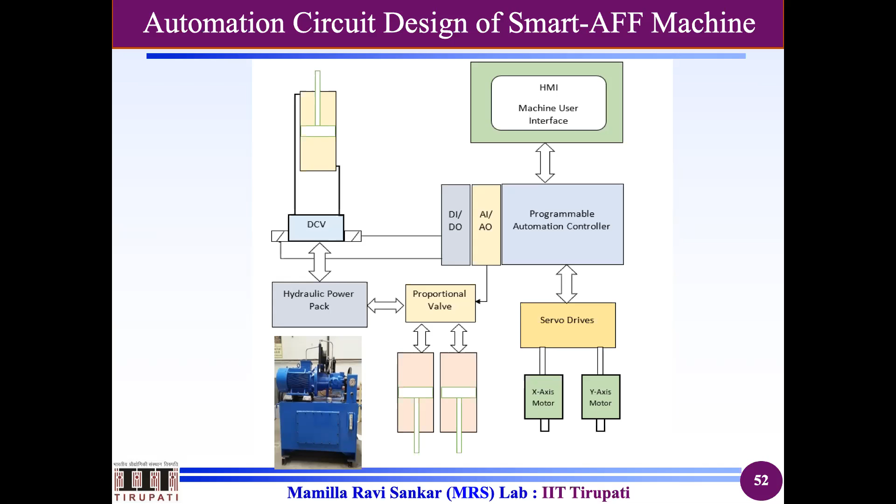Also, you should choose it in such a way that it has a proportional valve and other things, because sometimes when load is not there, it should not go very fast. Sometimes load is there, it should go fast. It should move proportionally. Assume that my liquid is moving from one cylinder to another cylinder. In that circumstance, one side is vacant and the other side is fully filled. So if there is no proportional valve, the piston on the empty side may go very fast. That is the basic drawback.

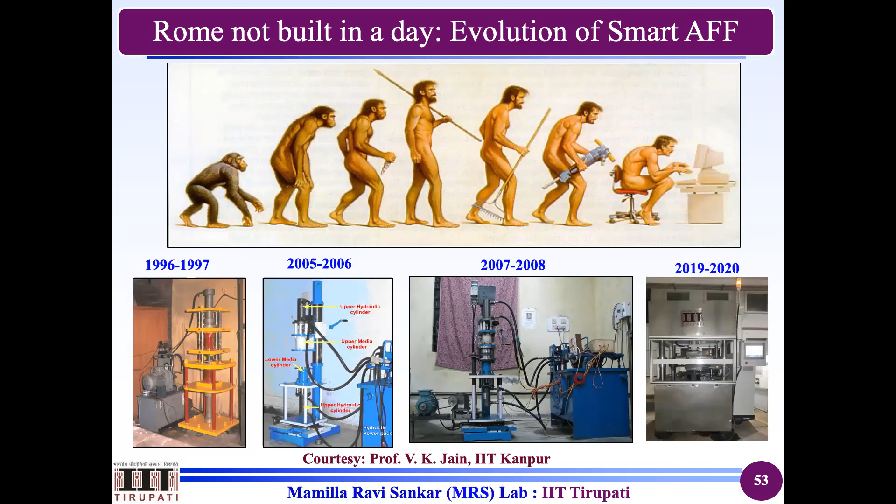So Rome is not built in a day. We started this particular machine in 1996 and 97. We built it, continuously improving, from 2005, 2006. Then in 2007 and 2008 we improved the rotational ability and the production rate. Then we made a smart machine, with a human machine interface, that you can see here clearly. This is the complete human machine interface machine.

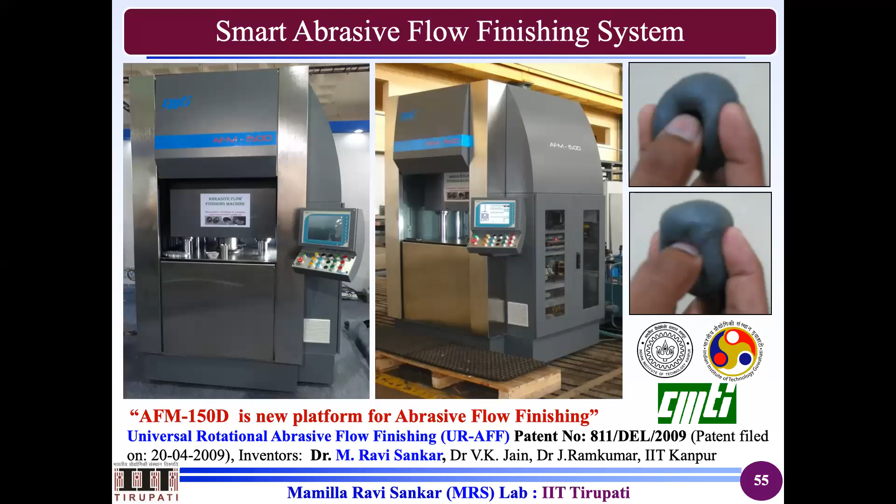This is a smart machine that we have fabricated at IIT Tirupati, which can polish simple geometries to complex geometries. We are working with many companies for polishing their implants and complex components. I cannot show them because of NDA agreements. We have also transferred our technology to some leading organizations where the machines are continuously working, and you can see the revenue generation.

This is also one of the technologies. This is not a smart one, but it is slightly automated, where you can see a lot of buttons here. So this is a button-controlled one, and this is a touch screen, completely embedded electronics controlled one. So that is about the technology.